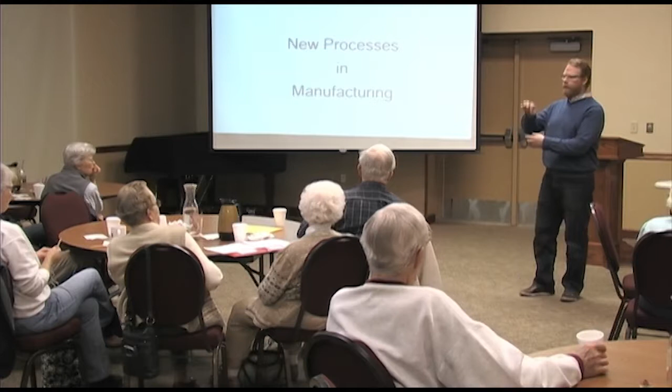When we came to McPherson, we had television, and some of the other faculty members didn't. Then came flat screen television, high definition television, where it looks like those people are right in your living rooms.

Plastic in everything. I mean, when we were kids, there was no plastic for containers and bags and everything else. And like glasses - I would hate to be wearing my prescription now in actual glass lenses because they would tear my nose off. But even our plastic is so high-tech now, compared to what it used to be.

Now we have fancy things like polycarbonate, and a lot of our advances in plastics and other technologies have come by way of aerospace, where, like the internet, it was originally a military concept and has evolved into more of a social, cultural tool now. There are lots of examples of technological advances, and I want to focus on a couple that are really prevalent right now and will have an impact on the automotive restoration industry and the careers of our students.

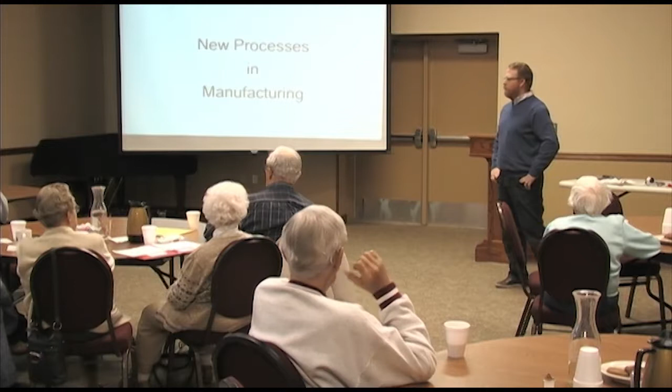And so we've now been here - I've moved my family. My wife also grew up in the LA County area, and we moved them out here, and most everybody else has followed us. I guess pulling the first grandkids away at that really early stage had some impact on that.

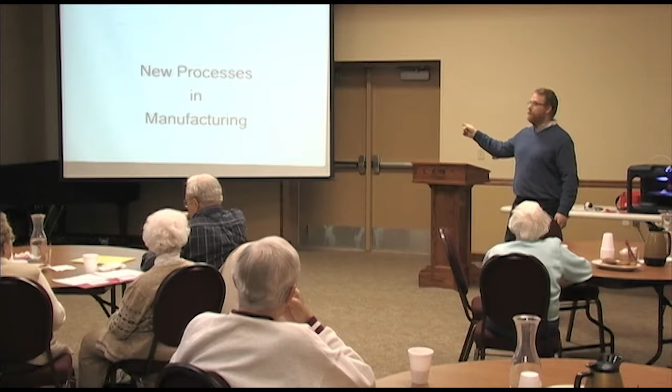So first, before I dive into any of the things - I just have a few PowerPoint slides to make sure I hit a few key concepts - but I want to describe a little bit about what I brought along with me today. This machine here is a 3D printer.

If you recall, back in the 70s watching Star Trek, they had this device called the replicator that would make things just appear on a tray. We haven't quite gotten to that point, but close. This 3D printer, which I set up about two hours ago, started a print job that I've stopped at about 80% done.

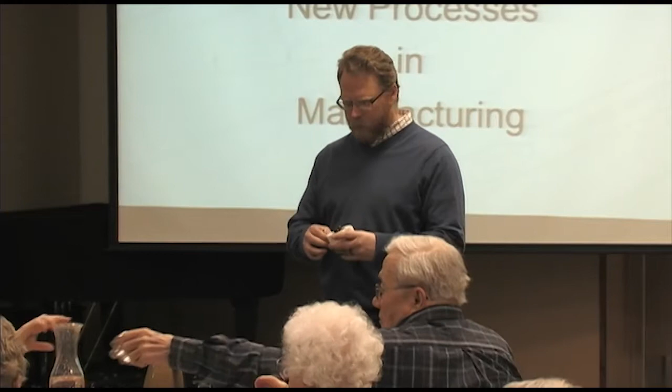I'm going to pass this around too - this is the actual oil pump for my Oakland with a printed piece in place, so you can see it's the right size, the way it should be. I'll pass that around.

One of the reasons these particular items and this process are important and beneficial to our program is that some parts are just not available for certain cars. If you have a Model A, Model T, Chevrolet, or Buick, you can generally get most everything you need. But if you have something a bit more oddball, you can't get parts. That's one of the main things - we're dependent on good parts availability. If we're going to restore a car that can go back onto the road, we need everything to be working properly.

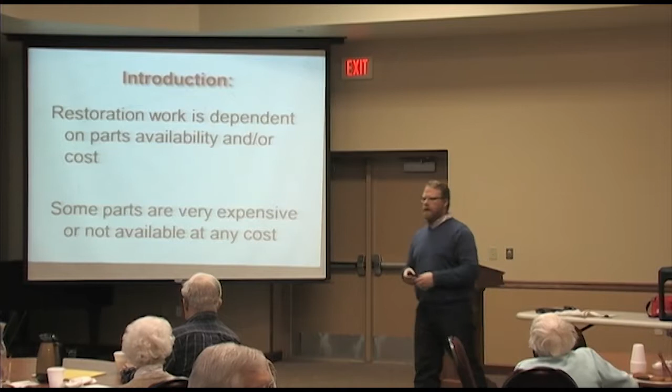When my Oakland is back on the road, I want an oil pump that's feeding oil into that engine so that it doesn't seize up. And one of the things we have trouble with is cost. I could get a machinist, but if I had to bill for my time to machine this part, very few people would be able to afford that particular housing that's needed.

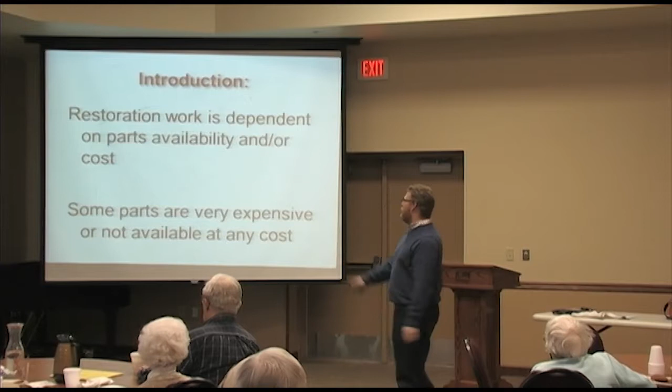So we also talk about this to our students, and when we do restoration work in our program, we have about 25 cars in process over there in that building right now. A lot of them are the kind of vehicles we can get regular parts for - Model A's, Model T's, and a good number of cars from the 50s and 60s which have good parts availability. But some of our earlier stuff is very expensive to get a hold of, if you can get a hold of them at all.

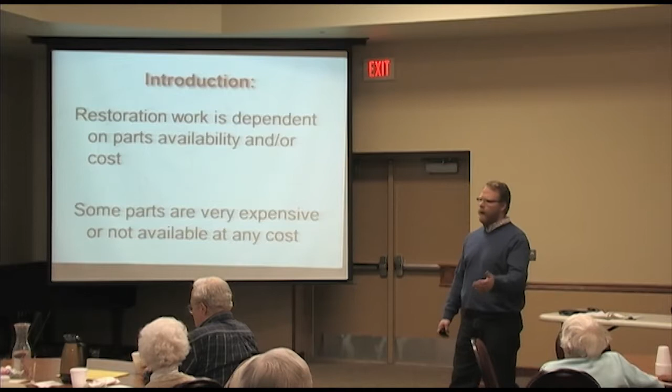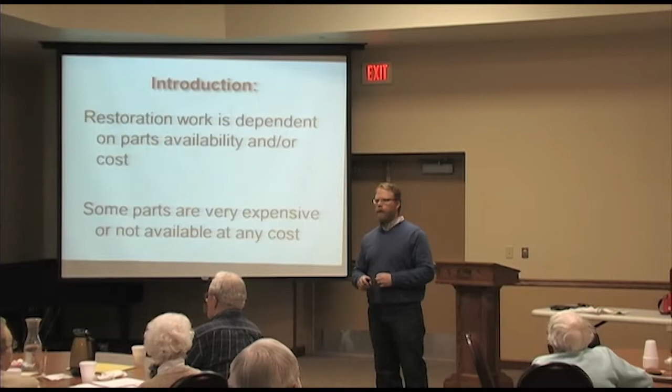That's one of the things we have trouble with here with this Stutz and a car like the Oakland - parts are just not available. If they are, they're very expensive. It didn't used to be that we would have other options on top of that. When we would discover there are no parts available, we'd have to simply hand-make that part, or figure out a way to do without it, or maybe find a part that was available from a parts yard or salvage yard or something like that.

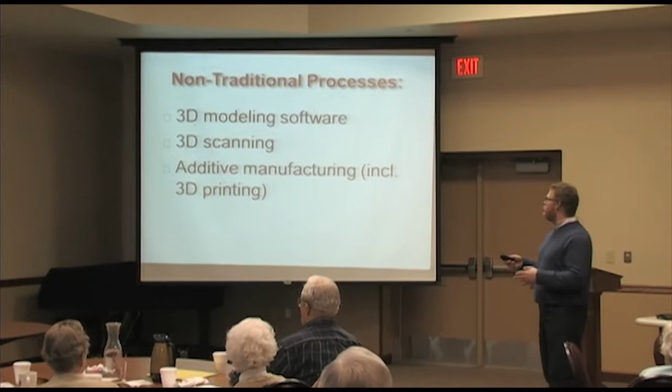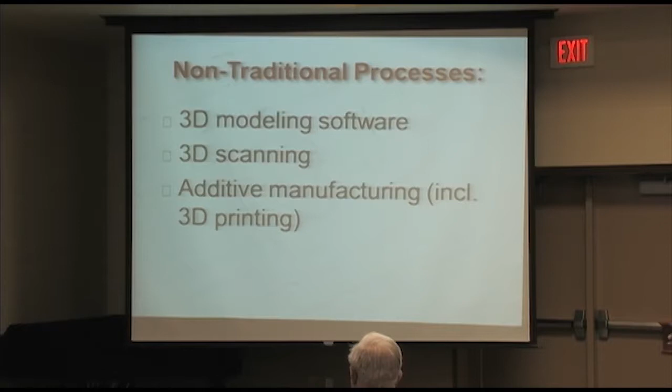All right, so we've talked about this and discussed those. I'm going to talk about a more general field starting out, and then we'll kind of narrow down. There are a lot of different processes out there that go under the heading of non-traditional processes. As a machinist, when I'm teaching my students to make a part, I want them to be able to use a tool to create a chip that's going to remove material from something.

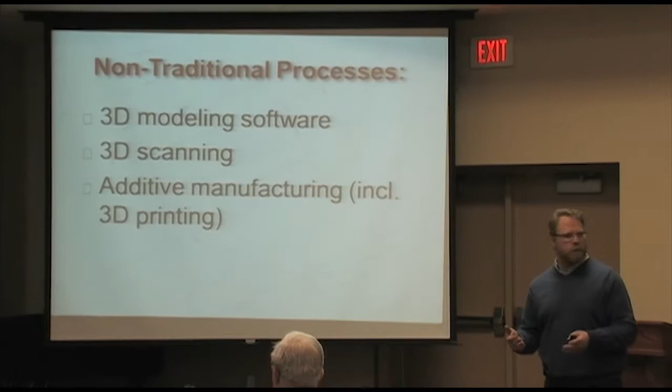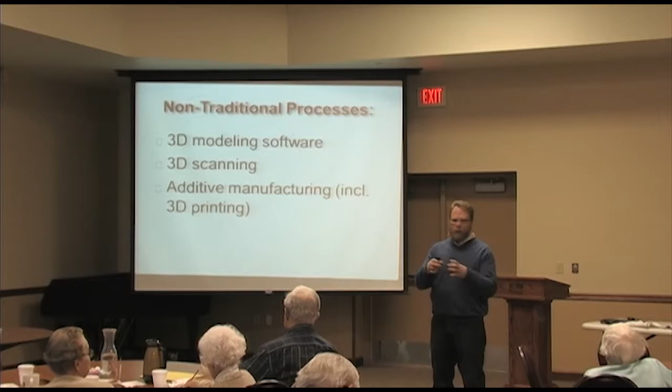Non-traditional machining doesn't always work in that way. In fact, one of the non-traditional machining processes goes under the heading of additive manufacturing. Additive manufacturing would include something like the 3D printer, where we're starting with nothing, using some way of adding material to a build platform to actually make our part. Instead of whittling away from a solid block, we're actually making the part from nothing.

So 3D printing, like I said, would be one of those things - additive manufacturing - but we need some other processes to go along with that to really get full impact from that. Those things would be 3D modeling.

Any of you have any experience with drafting, technical drawing, any of that kind of stuff? No, nobody here? A little bit?

They will start with - if I needed to make this oil pump housing, I would start with something that was the shape of the outside, the profile, and then I would tell it to make it so big, and then I would start whittling away from that. It would actually make a 3D representation of the part that I wanted to make.

So all along as you're creating the part, it's looking like it's going to function like it's supposed to. And that takes a little bit of the machinist being able to translate the part drawing out of the equation, which is sometimes good and sometimes not if the draftsman messes up something.

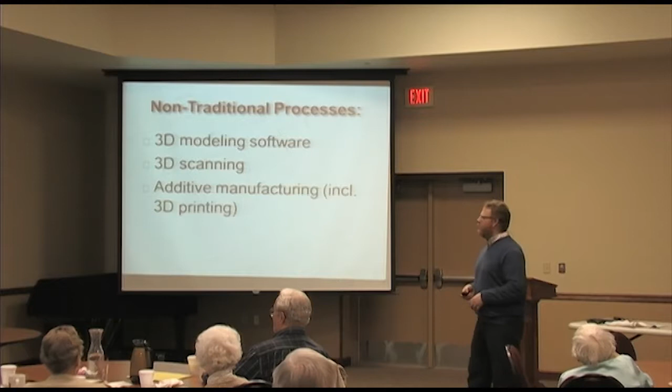Howard Hughes would have liked that. Oh yeah, I think he would have. He was a creative thinker like that, and I think he would be fascinated by this kind of stuff. A little bit of a recluse at the same time, but yeah, totally fascinated. He had the money to pursue it too. Yes, he did. And because of that money, he also had some very interesting cars built, I would say. We're always looking at, hey, what kind of cars have these guys made over the years?

So here's where we are now, just a quick headline. This is taken off of Wired from UK. There's the headline: NASA just emailed a wrench to space.

This happened two weeks ago, I think it was. Does that not blow your mind a little bit? It's like, how does that work? Right? So somebody here...

...designed in software a wrench that they needed. Well, first of all, they sent the email for the part that they needed to replace. So they had this part printed, but then they realized they had no way to install it, so they sent them the wrench. It was kind of a two-step process there. And lo and behold, they've printed 21 different items on a 3D printer, much like this, in space, in plastic. All of those parts, minus the wrench and the one part they just made, have actually been shipped back to Earth, brought back physically for testing to see how things react in space. Does it print differently than it prints here? To me, that's just really fascinating.

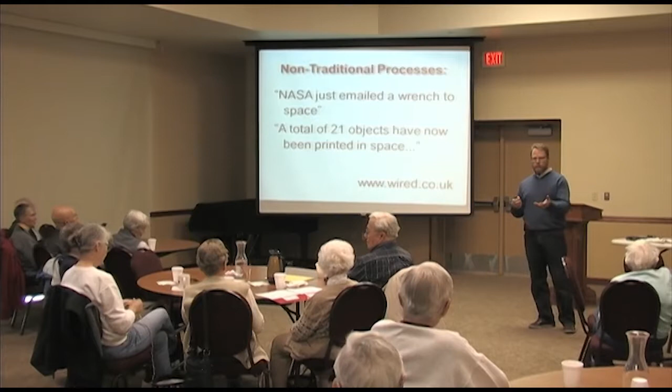One of the good things about a technology starting to take off is not only is it used more, but once it's used more, the devices used to do that come down in price. A machine like this costs about $3,000 to $4,000 if you just buy one. If you go on Instructables.com, you can read 20 different articles about how to make one yourself out of spare parts. There's a whole culture of getting parts from someone who made their printer, and the only cost is agreeing to print 10 more of whatever it is, so the next guy who makes his gets parts from you. It's circular, it keeps feeding itself.

You could build one of these quite large. In fact, 3 weeks ago the Detroit Auto Show had a guy there printing a car, and one of our students got to ride in it. They printed everything but the engine, the tires, and the wheels. It was an electric car, but imagine how customizable that could be. You look at the picture and say, I want the seats a little more laid back so I can really ride in comfort. Or, I'm 6'7", I need more room there. Okay, click, done, more room. The technology has taken us to places we could have hardly imagined years ago.

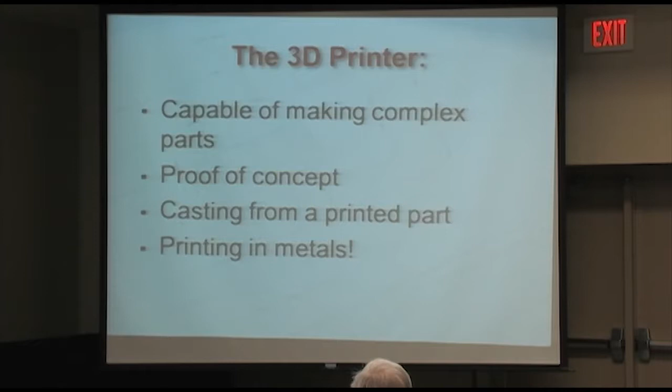But it can do just about anything. If a part needs a hole in the middle, if it's supposed to be hollow, it will skip that as it's printing, and it will be hollow in the middle even though there's no way to get to it. It can print very thin objects, and the better machines you get, the resolution gets better too, meaning it'll be finer and finer.

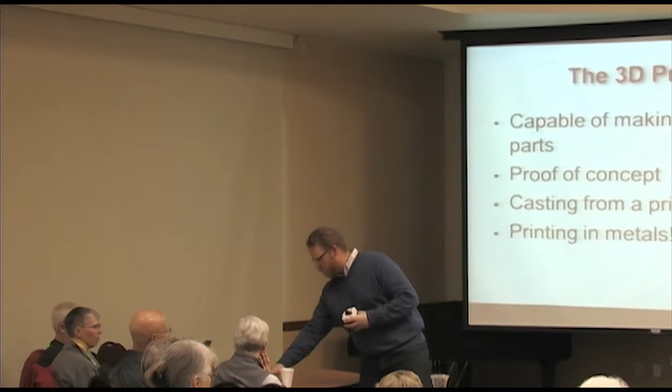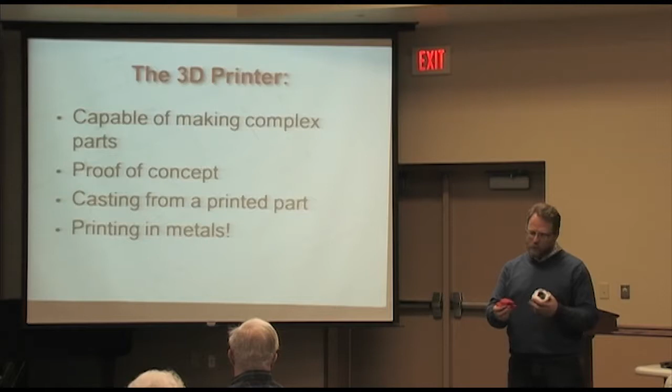One of the reasons I printed these parts for the Oakland was I wanted this out of aluminum or some other material to actually work in the engine of my car. But before I went to the expense of putting this in a machine, or chucking it up and buying a $40 piece of aluminum, it was really inexpensive to come over here, plug in my program, print that part, drop it on there, and turn the gears. Yep, it works just like it's supposed to, as opposed to making a part where maybe I had a dimension wrong or wasn't sure it would work.

So proof of concept is a really interesting use of 3D printing. It's very inexpensive - a roll of the filament this machine uses is about $45 to $50 by the time it's shipped, and a roll of filament will last a long time, by the way.

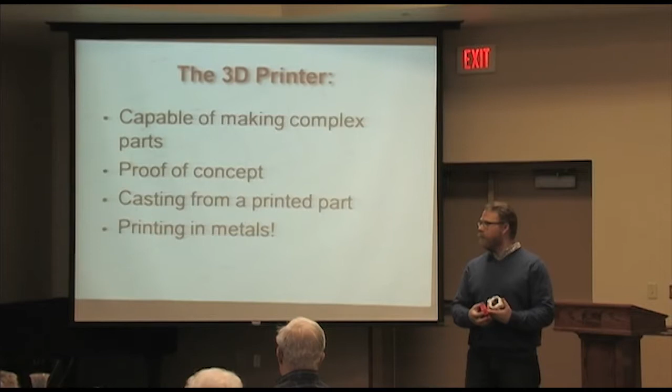Can you recycle that once you're done with the part? Yeah. Can you put that through the machine again? No, not at this point. I would expect that as these machines are around longer, there will be some way of doing that, because it is the type of plastic that could be used again - it could be made liquid again over and over and used that way.

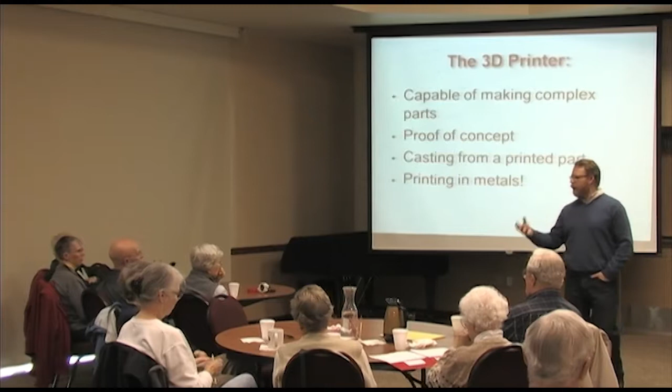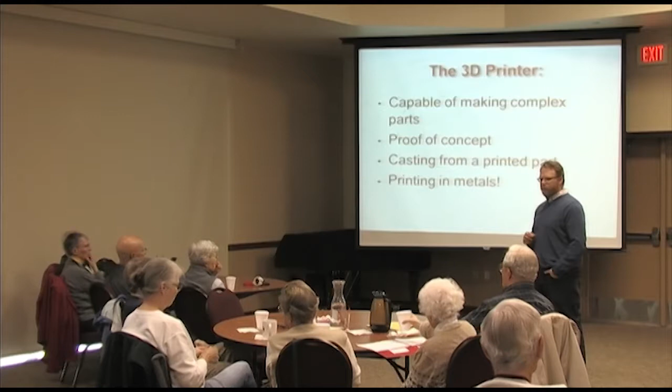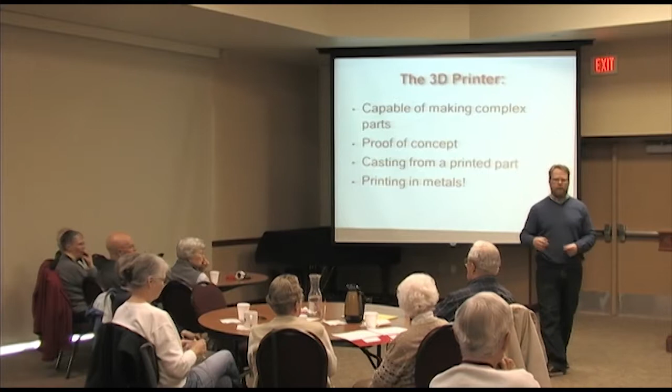So you really wouldn't use that part in your car? Not that particular part. You wouldn't use it as a plastic part? Nope. But before I went to the expense of machining that part, I wanted to make sure it worked like it should. So, wherever the aluminum block is, this is what the finished part would end up looking like.

Right here, this would be able to withstand the heat and the wear as the engine ran. So, proof of concept, a good way to utilize these machines.

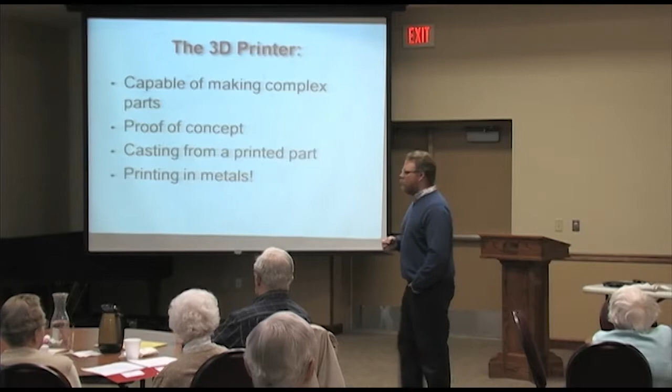I was hoping to bring one more example today but didn't get the chance. This piece made for the Stutz Blackhawk - one of our faculty members in the art department was doing some casting in bronze over January term. I gave her one of these, exactly like this piece, and asked if she'd try casting using this plastic piece as a mold. She and her husband, Ann Zerger and her husband, put this in their sand and added some features so we could get the bronze to it, then put it in an oven and burned out the plastic at about 1,000 degrees. That leaves a cavity, a void, and she poured it, and now we have a bronze piece that we can use.

So we have the capability to do some foundry work within the auto restoration program. That's one of my main interests in this technology - being able to say I can't get this part, sit down, design it on the computer, get it made so I can have a representation, make sure it looks right and has the right dimensions, and then cast the part in metal. Then it will be usable - we could lightly sand it, throw a little paint on it, and nobody will ever know it's not the original part.

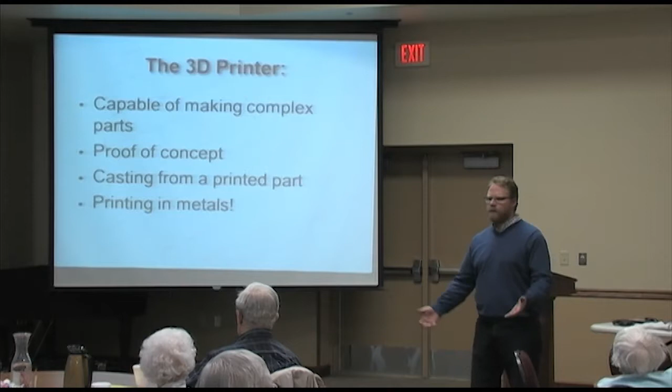A lot of these machines are actually ending up in third world countries where the medical attention people can receive in a medical facility is very basic. But if they can get somebody to scan a leg for somebody who's stepped on a mine, through no fault of their own, and then print them a prosthetic leg, that's going to be massive as far as producing something that would otherwise be impossible for somebody in a third world country to afford.

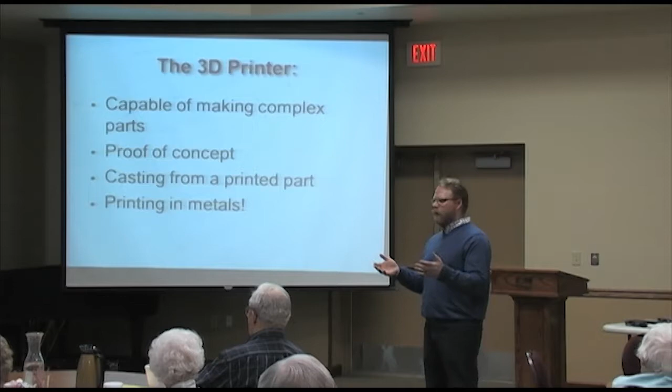You say these machines will become common in homes after a while? I say, why not? Could be. I don't know what uses they might have in a home, or like a small shop in a home, but maybe print up a Tupperware container. That's something we Americans are pretty good about - doing a little head-scratching and saying, how can I make this useful for something else?

Would it be useful for people who are wounded in combat and lose an arm or leg? Yeah. One of the other articles I've read recently is they made a prosthetic hand for a girl, and it cost about $400 compared to $400,000 for a metal prosthetic. As her body grows, since she was a teenager, all they have to do is change some dimensions and print her another hand at a very low cost.

I don't know where this will end up being, but we're pretty good at finding uses. In some cases, very useless uses. In other cases, very useful things like prosthetics.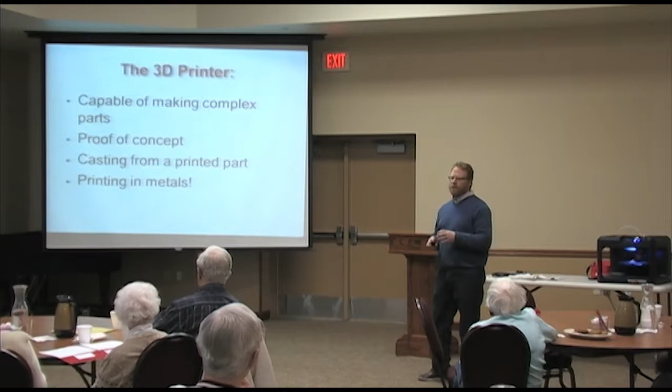So printing in metals, that's pretty fascinating stuff. Obviously it takes a lot of juice, a lot of electricity, so you have to have a facility that can accommodate that. But if you do, I'm waiting until Wichita State is done with their first metal printer and upgrades—I think we need to get our noses in front and ask what they're going to do with that machine.

Some of the obvious things that 3D printing and other additive manufacturing processes will do, and will be impactful for restoration students, is it should bring manufacturing costs down, especially for those most obsolete parts that you really can't get. You have to have an economical way of producing them, and I see this as the wave of the future to bring that level of economy into the reproduction of parts.

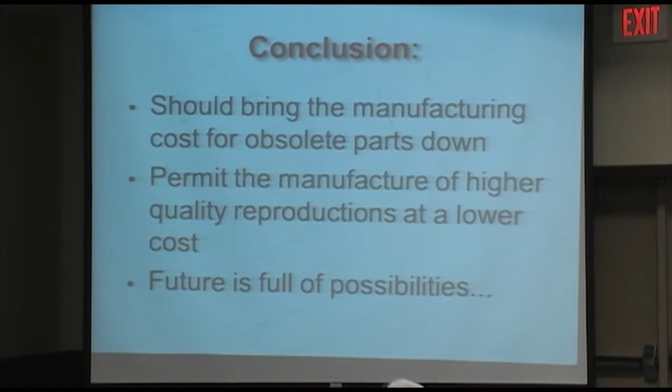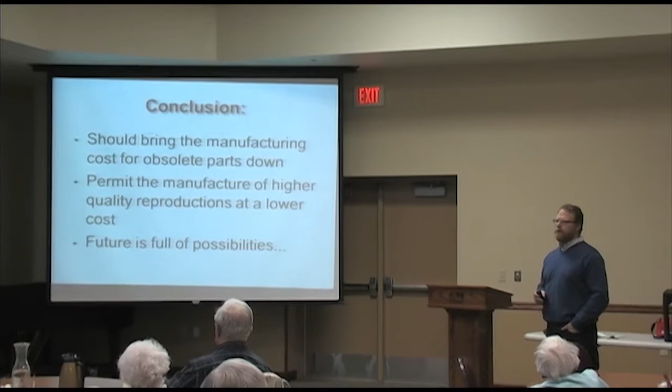It should permit us to produce higher quality parts. One of the limitations we see all the time with reproduction parts is, yes, they're available, but they're barely of a quality we'd actually want to use, and require lots and lots of rework to actually make them right.

That's a matter of economy. The manufacturer of that reproduction part didn't make it as good as it could be because of economic constraints, not because they lacked the ability to. They've got to make a decision—I'll be able to sell 50 fenders a year of this particular model. You can't spend over the moon to make that part absolutely precise if that's the only number of units you might produce. But if you can sell 500,000, then you can increase the quality and amortize that over a lot more parts.

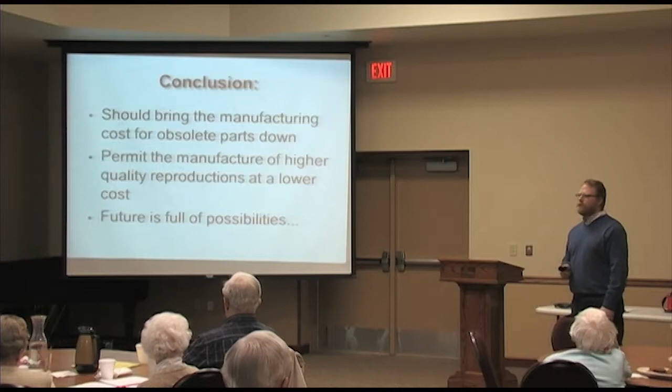As I mentioned before, and we've alluded to it in a couple of comments, the future is really kind of limitless. There's a lot of possibilities out there for uses of this kind of thing.

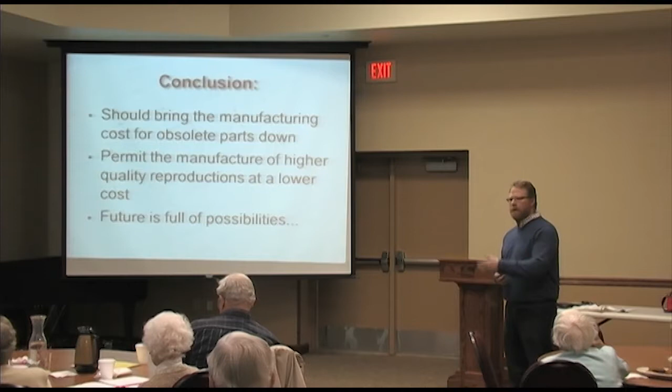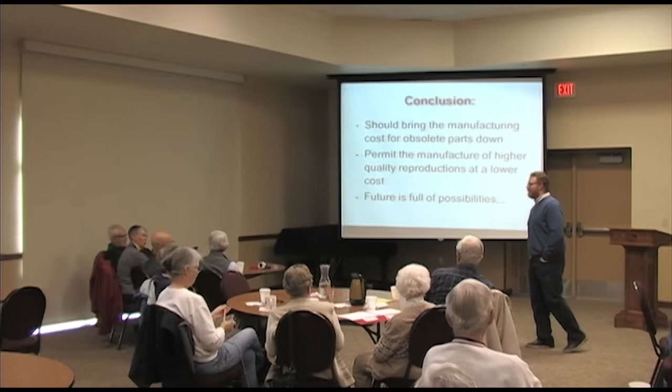Comments or questions? Yes, ma'am. You have to be able to communicate with that machine as to what you want made—you just can't whisper to it and say whatever. Yeah, you have to... I'll give that part. Is that all on the computer?

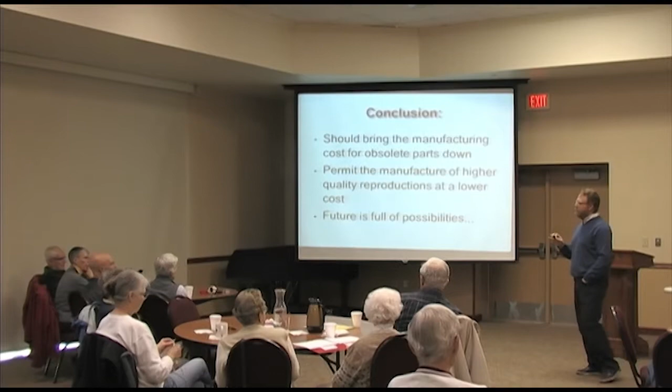I'll walk you through the process pretty quickly. So the first thing I will do—okay, a student brings me this part and says, as a machinist for the restoration program, can you make me another one of these? Well, that's pretty complex, and the way it's shaped doesn't lend itself to being machined. It's more that it needs to be formed somehow.

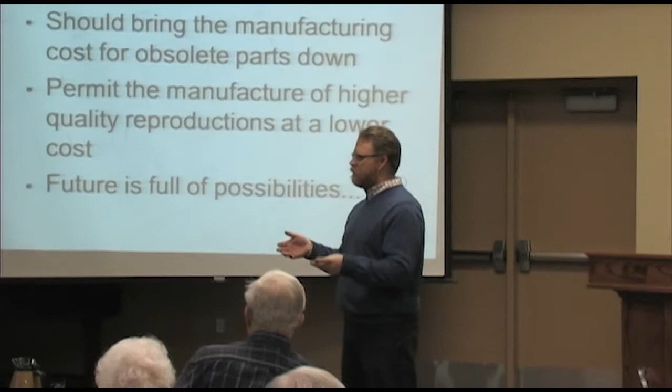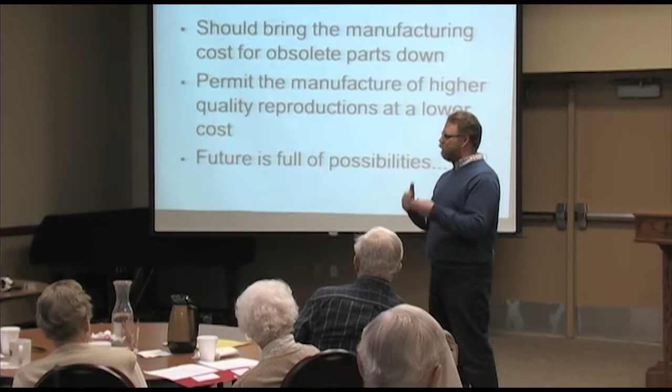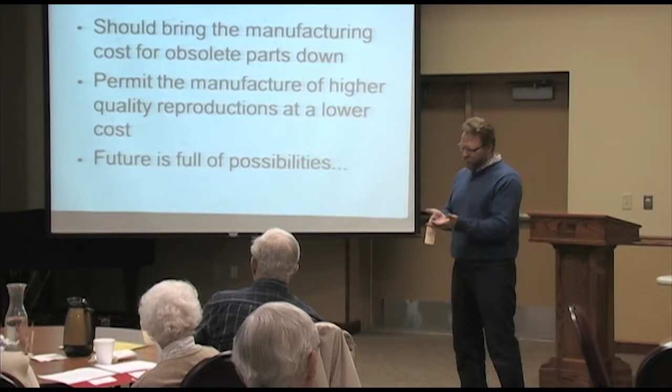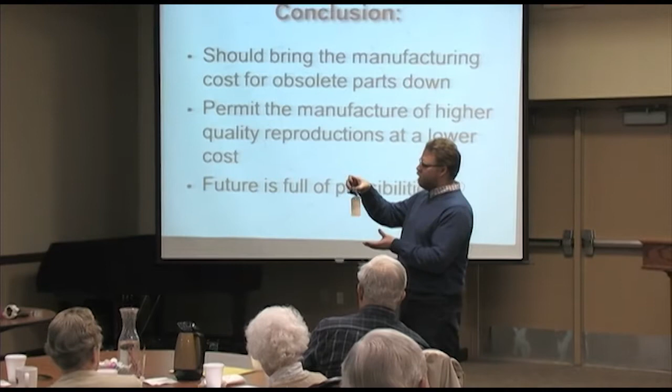So I sat down with my measuring tools at my desk in front of my computer, and I actually sketched it first with a pencil, writing down all the key dimensions. Then I started plugging those dimensions into the software—we use a program called SolidWorks, basically a drafting software. So you're doing your drafting in this virtual world on a computer screen. As I tell it different dimensions, where things are supposed to be, it starts to form this 3D representation, only it's whole now, not broken.

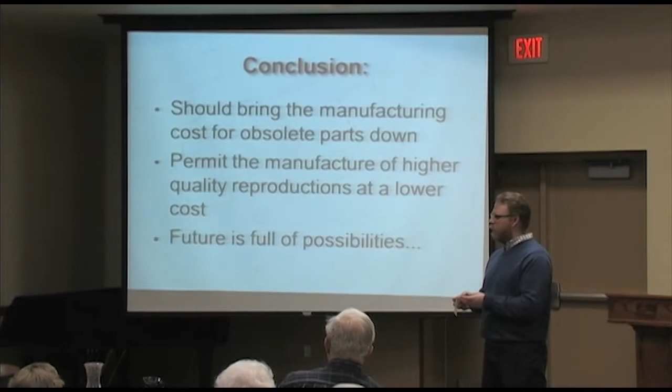And then when I say, okay, looks good, I am confident my numbers are right and it looks right, I will save that as a separate file. It's called a stereolithography file, and basically it's just a couple thousand to hundreds of thousands of actual data points that make this point-to-point structure representing the part.

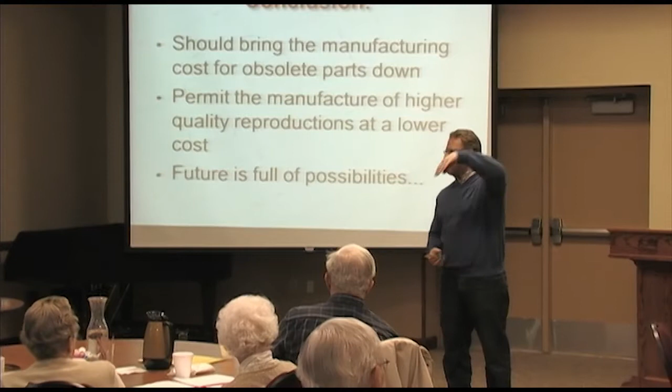I send that stereolithography file to the machine. I can either do that wirelessly, which is kind of cool, or I can use a thumb drive, which is also very handy. And we haven't done it yet, but we could just wire this up through a cable right to my computer, and I send it to the machine.

Sorry, there's one other step there. This is a MakerBot machine, and MakerBot has this desktop, basically a landing pad for that file that I sent over. It'll allow me to move the part around, it'll allow me to change its ratio. So if I had a small part but I wanted to make a bigger representation, I could tell it to make a bigger version.

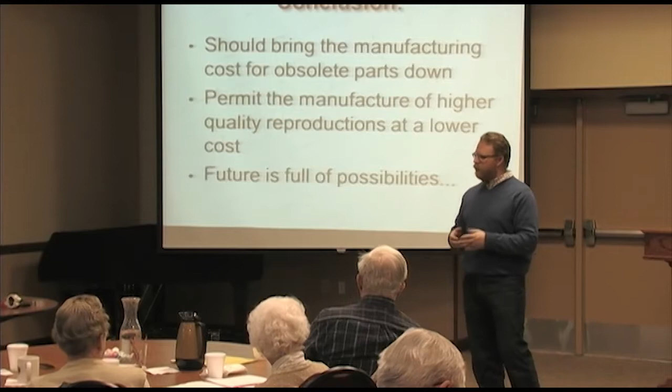Or if I needed it to be smaller, I could tell it to scale it down. I'll give it some different parameters about the resolution, and then I just tell the machine to print, and it starts printing. And then we just get to sit back and watch it go.

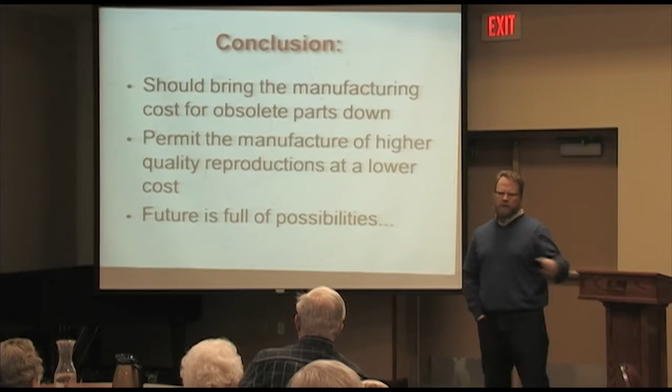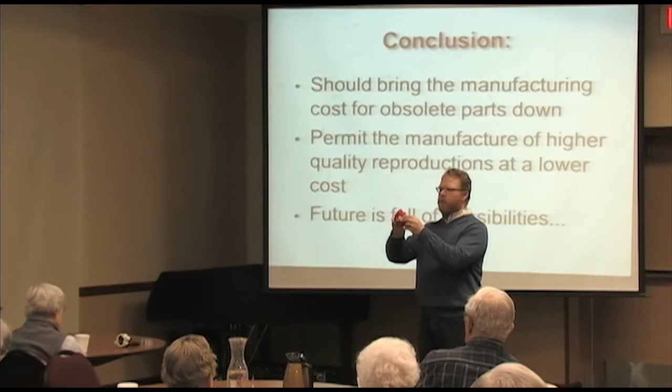So the prints that I've done have gone anywhere from this runs about an hour and a half to the oil pump runs about 2.5 hours, although if I turn up the resolution a little bit, it's more than 4 hours. So you can give it some different parameters.

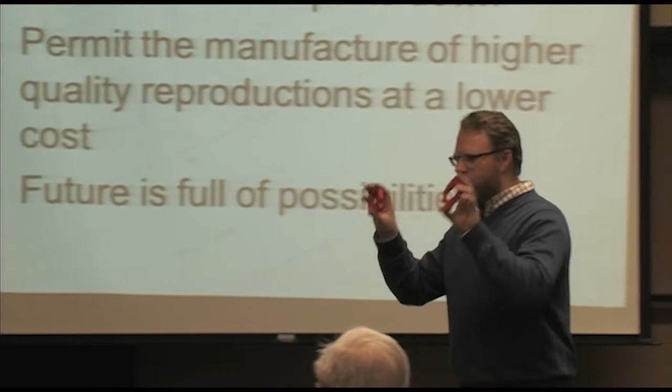If you got to see the inside of this piece that had been cut apart, you can see it's got a honeycomb structure in there. I can tell it to fill more or fill less, and obviously the more it fills, the more filament it will use and the longer print time it will have, but it really doesn't change its strength. I can squeeze on that pretty good without really deforming it.

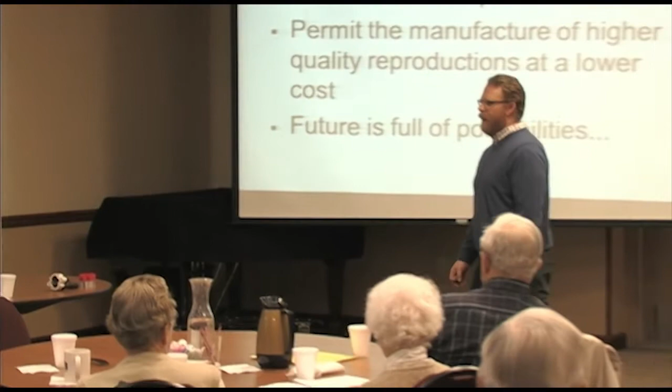So it's actually easier than you might imagine if you have the right software to make the original drawing. I was surprised how well this worked.

Yes, how expensive is it if you make a mistake in what you tell it to do and it prints something you don't want? Not expensive at all. Each one of these prints probably costs less than $10, which is not bad at all.

Are students at McPherson on restoration being taught how to measure and put that information on the computer and then go right there? Is that what our kids are learning? So they are definitely learning how to measure and be able to sketch this out. It's not required that they take the drafting course that teaches the software and results in them printing their part up here. That's not a requirement of them, at least not at the moment.

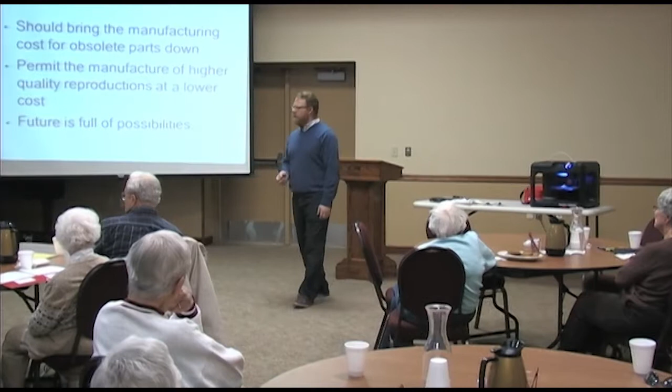But they can take the CAD course, and in the CAD course, they learn how to do the drawing, and then they will be able to send their part to the machine and actually print it, which is really good feedback. I think that's another area where this is particularly useful that I may not have mentioned before, is it's good feedback. You did something, and especially if you can see that it's right, that's good feedback for students.

So if I'm a graduate of your program and I go out and get a job, and the car I'm working on needs this, would I hire you to make a part like that for me because our little shop doesn't have that? Is that the way that works? Most of the restoration garages, however they do it, wouldn't have that. So they would call back to McPherson and say, I need this, or go to some place that makes parts like that.

They could possibly come back to us with a request for that kind of thing, and I kind of like doing this, so if I could fit it into my schedule, I'd certainly do that for them. But they probably could afford the software to do the drawing themselves. In fact, anybody who takes the drafting class gets a 1-year free license from the company anyway.

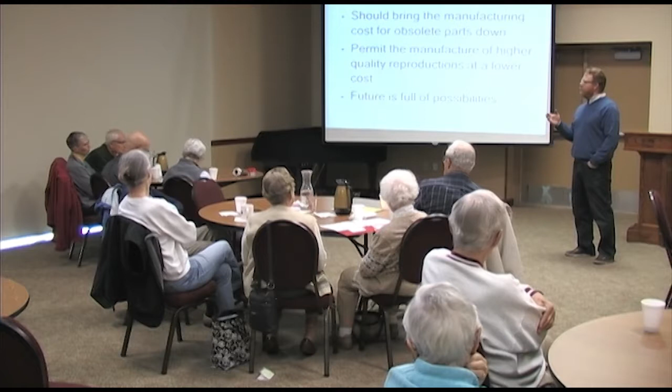Especially if they haven't been gone long, they probably have that file on their computers. As for printing, there are probably a dozen different companies across the country who, if you send them an STL file or any number of other file types, will print that for you in probably 100 different materials depending on what you want. You might be talking about a couple hundred dollars to print something, but if it's in a durable material, how much might that part cost to be machined? Thousands of dollars probably, depending on the complexity of the part.

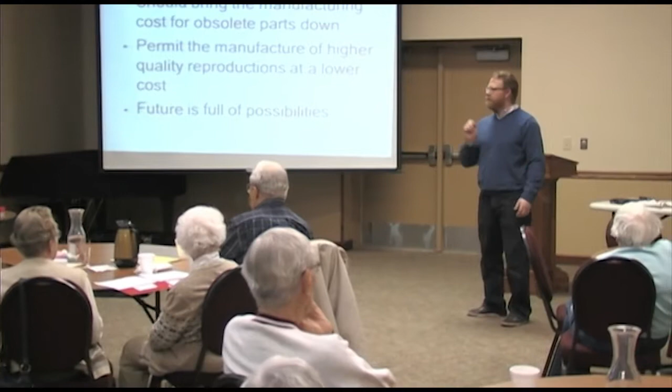So there's a nice network where you don't have to have this machine in your shop. You can send it to somebody who that's all they do. In fact, these shops will also print in metal, so you can tell them, hey, I need a bronze printing of this particular part. Again, it might be several hundred dollars, but it might be worth it.

There's a shop up in Wisconsin that I visited a couple of years ago, and the main thing they restore is vintage and competition Ferraris. Incidentally, if you had a chance to buy a Ferrari back in the 60s and you passed on it—oh my gosh, these things are going, if any of these competition Ferraris come up for sale, they're often bringing 20, 25, 30 million dollars now. It's like, whoa, that was a beat up race car at one time that nobody cared about.

So you take this beat up race car that nobody cared about, and now somebody wants to restore it and put it out on the lawn at Pebble Beach, which is the Super Bowl of car shows. If I'm missing that piece of trim that only appeared on 6 Ferraris ever made, I'm probably going to be willing to pony up $2,000 to have one printed, as opposed to maybe $20,000, $30,000, $40,000 if there was one laying around somewhere in Italy, because they're obviously going to know what it's worth. So it opens up a lot of possibilities, and this shop in Wisconsin has been really forward thinking and on the front edge of this technology, utilizing it to their advantage.

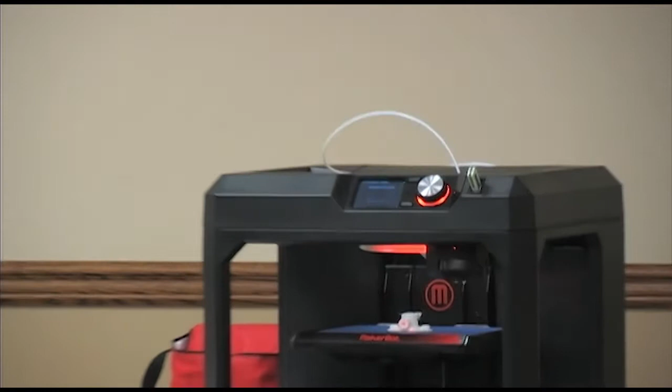Amanda, you want to warm that, and I'll crank it up. Okay, let's see. All right, so you'll hear some noises coming from this machine as it begins. Let me describe just briefly how this thing works. Can you see this white line that's up here on top?

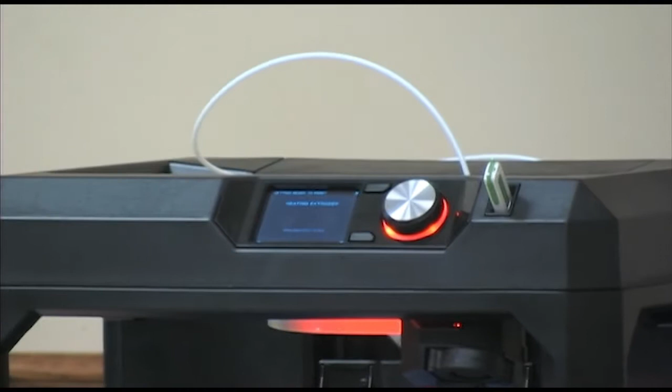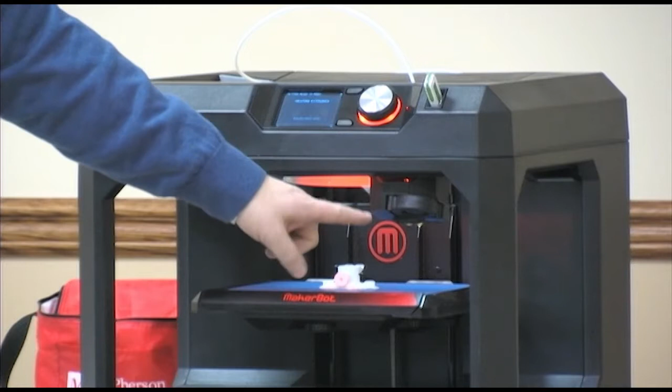That's simply a liner and a guide that feeds what is essentially a fancy string trimmer line. There's a filament on a wheel in the back that looks a lot like string trimmer line. So that's feeding up and into right at this area here, and you'll see this guy take off as soon as it's warmed up. It's at 71 degrees Celsius, needs to come up to 215 degrees Celsius, so it'll warm up. It feeds into that heated head, and then it just deposits a small line of molten plastic down as it moves. Think of it as a super, super fancy hot glue gun.

Basically, that's what it is. Yeah, so instead of glue, it's putting down plastic. Incidentally, this print will not be as durable as my other prints because it doesn't like to be stopped. It likes to put plastic down on top of already warm plastic, so it tends to break wherever you have a pause. But I wanted to get something partially printed for you guys to see, and then let it finish the process as we were winding up.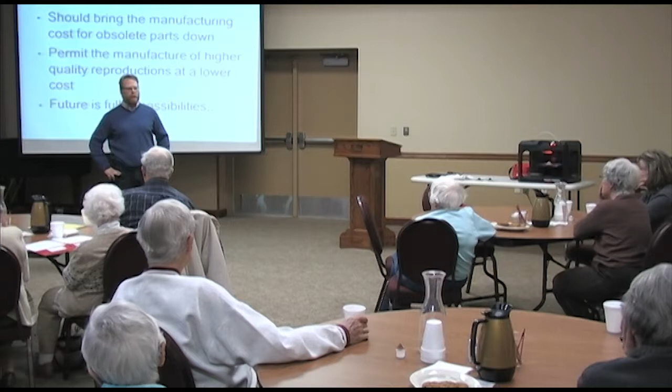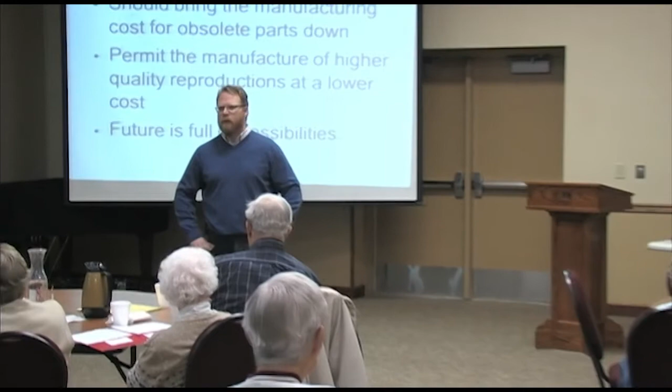So there you go. The future's pretty bright with these types of things, and I'd expect that every couple of months you'll read a headline about an additional use, a new thing done with 3D printers, probably for the next decade. They're even toying around with printing human tissue. There's supposedly a machine somewhere, I think in Europe, where they are printing a hamburger. I don't know how good that would be. How do you print lettuce? I don't know, but maybe it's a bare bones hamburger, probably.

But if that were to really take off, what are the other implications? Well, we could place available food in places you couldn't before, whether it be military use or whatever—printed on the space station, printed food. Get on the space station, just email it through that. Yeah, now you have to have the raw material, the filament—but it'd be all liquid. It's easier to transport liquid up there than to take up space.

Yep, so here she goes. So what it's going to do is start filling in. It will do the honeycomb shape, and then you'll hear it start to make some really fascinating noises as it does the peripheral, as it starts to profile. So there we have it.